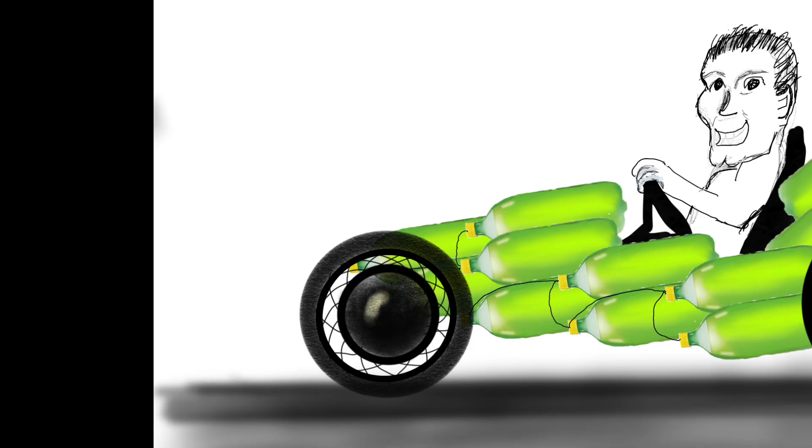Ever since I did the video with my grandson where we would pump up soda bottles to 100 psi and then shoot them with a pellet rifle to watch them blow up, I've been thinking about how I could make a motor that would run off of air, and maybe even a cart made out of soda bottles that would power that motor. That's what this video is about. Stick around.

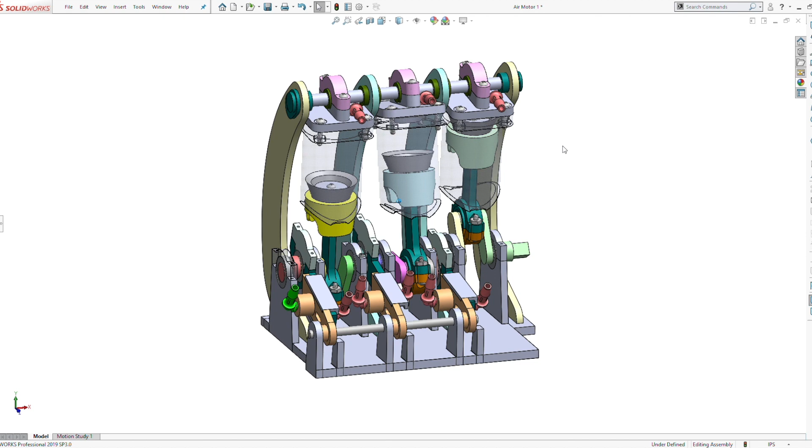Here's a view of the completed 3D model. It's basically a little 3-cylinder engine. Each of the cylinders has a 1.5-inch bore with a 2-inch stroke. The cylinders operate 120 degrees out of sync with each other, so that one will always be in what I'm calling the power stroke.

Here's a simplified view where I show only one of the cylinders, the piston, the rod, and only one of the timing valves. The compressed air enters the green elbow here and exits out the red elbow, up to the top of the cylinder where it enters. This timing valve regulates when that all happens.

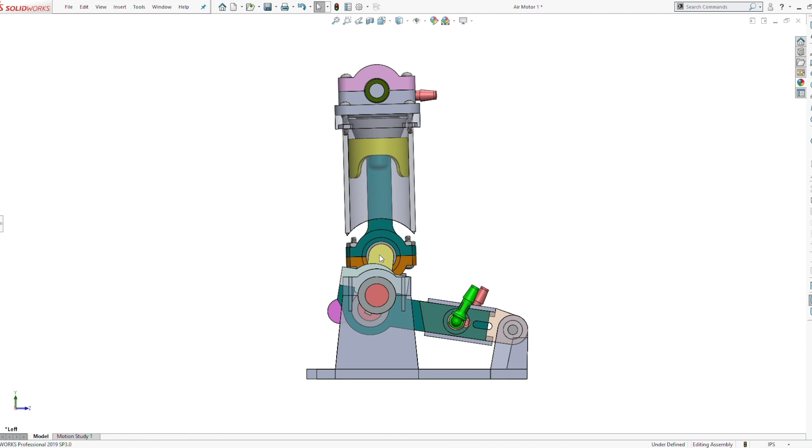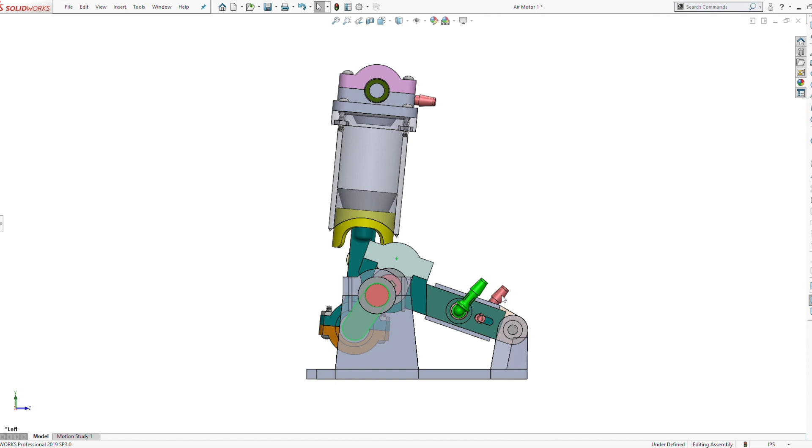As the piston is coming down in this scenario, the port with the green elbow aligns with the port of the red elbow, forcing compressed air down into the cylinder, causing it to come down. Once it reaches the bottom of its stroke and starts back upward, the air has to exit the cylinder. So the red elbow aligns with an open port on the sliding valve, allowing the air to exit. So basically you have air coming in, air coming in, air going out, air going out.

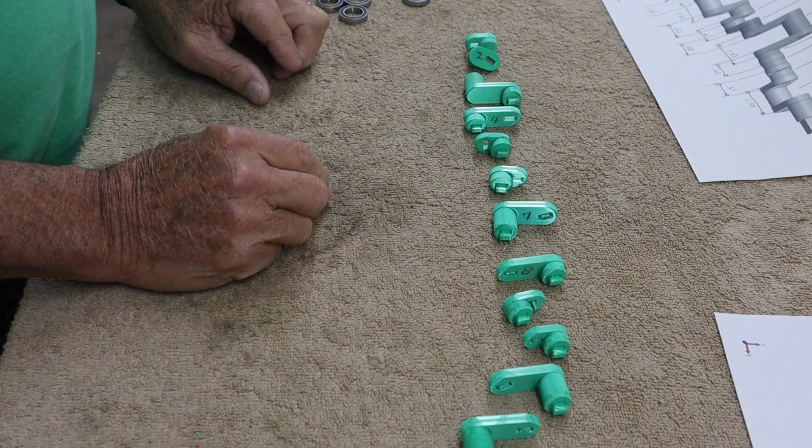Here's the crankshaft I printed. I had to print it in segments because I have to be able to put these bearings on in certain locations, so I'll have to do some sanding on them. I've already done some sanding on this one, and on this one.

In this case, this bearing is going to go right here, like so. That's part number one. Then part number two also has to have a bearing on it. It's going to go right here. You want them a little bit snug, like that. So this will go to here.

I have these indexing nubs, you might call it, where each of these pieces is indexed to the piece it adjoins. Once I get all this together and fit it into what I'm calling the block, to make sure everything's aligned, then I'll put super glue on there.

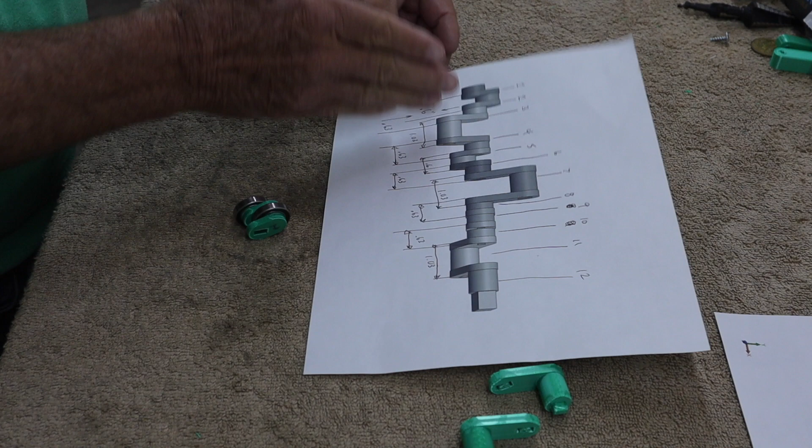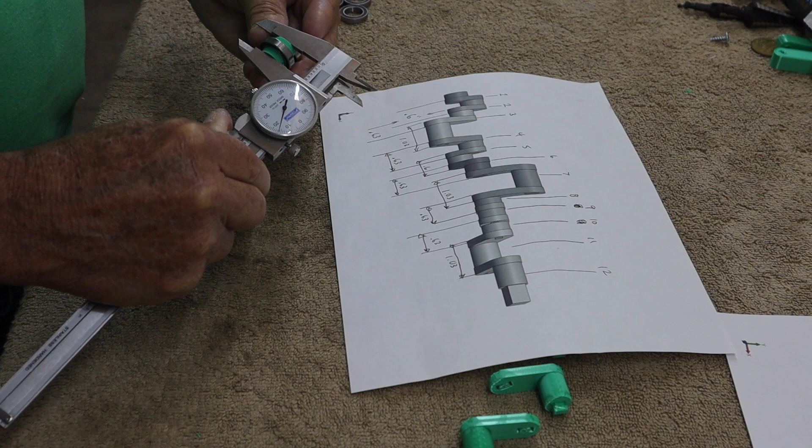Another thing I have to be aware of is that because these parts are printed, they might not be exactly the right thickness. So I've created this sheet that shows me, for example, between part 1 and part 2 I should be at 0.6 inches. I take the caliper and measure that distance just to make sure they're close together. I'm at 0.615, so this is a little bit thick. I'll have to do some work on this to get it to go together better.

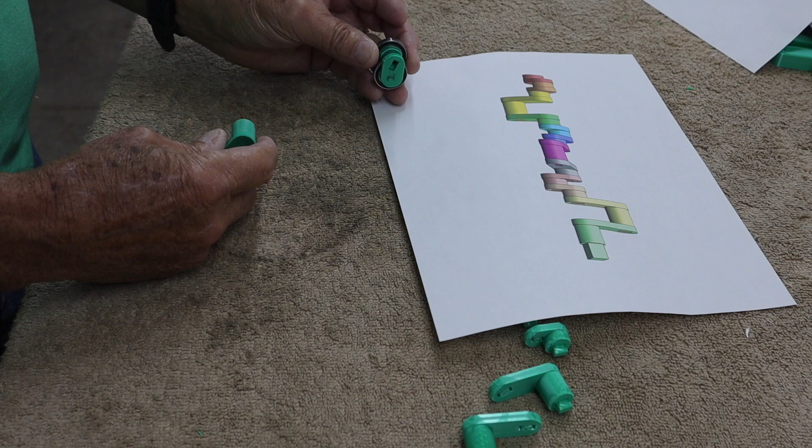Part number 3 adjoins to number 2. I can tell by my colored image that part number 3 will adjoin to part number 2 because it's turned like this. Now this part here is actually turned like this, and will be facing down like so. But I have to put a bearing on there first.

So let's slip a bearing on, like that. And then this will go like this. Again, I have to check the thickness here. I can tell right off the bat that this is thicker because I've got slack in here. So this indexing nub is a little bit too long, so I need to take some of that off.

Since it's very difficult to work with these pieces—they're flopping around and hard to deal with, and you've got to make sure you get them in exactly the right order before you glue them—I've decided to go ahead and assemble what I'm calling the block, or at least part of the block.

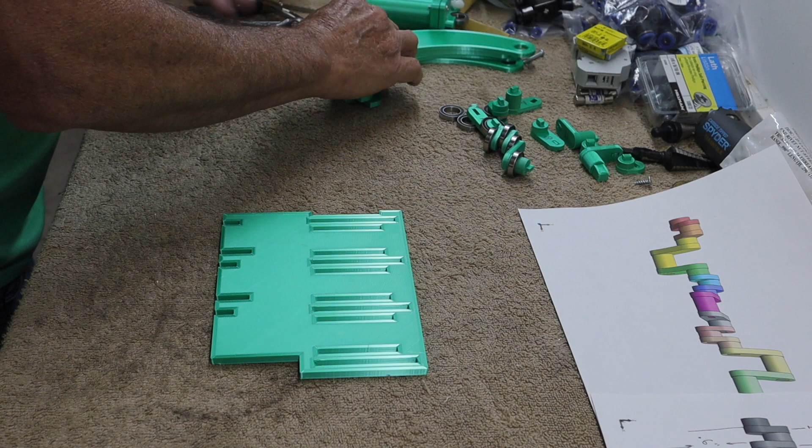Here's what the crankshaft is going to set in. So I need to go ahead and put these things in the base here so I can set the crankshaft in as I'm assembling it. I'll have me a nice flat surface here. I take these, and they're going to set in like this.

The main thing is I just want to make sure they're flush on the back, which that one is. It appears to be pretty well lined up, so I'm just going to put a little bit of super glue on it now. I don't see any bleeding through, so that'll be all right there. Let's go ahead and put another one in.

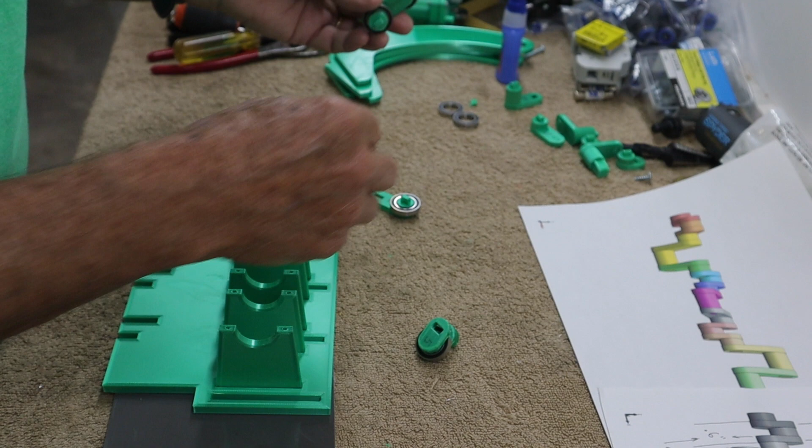Okay, this is part 1, 2, and 3 right here, and we're going to have 4 on there like so. I believe this is going to go in here right like so, like that. So you can see what it's looking like.

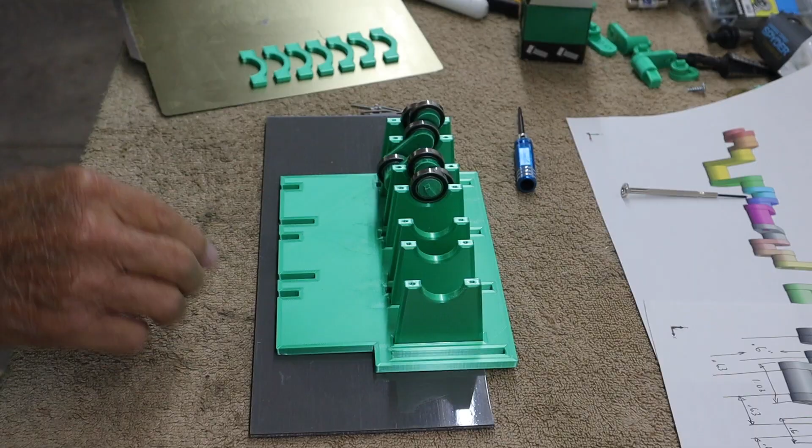Okay, so these parts are ready. My bearing caps here — we're going to go ahead and put these on just to help hold this thing down as I build it. First I have to drill these holes out a little bit.

The printed holes in these parts turned out to be almost perfect for threading these screws into without any tapping or anything. I'm just going to go real slow because I don't want to split those parts.

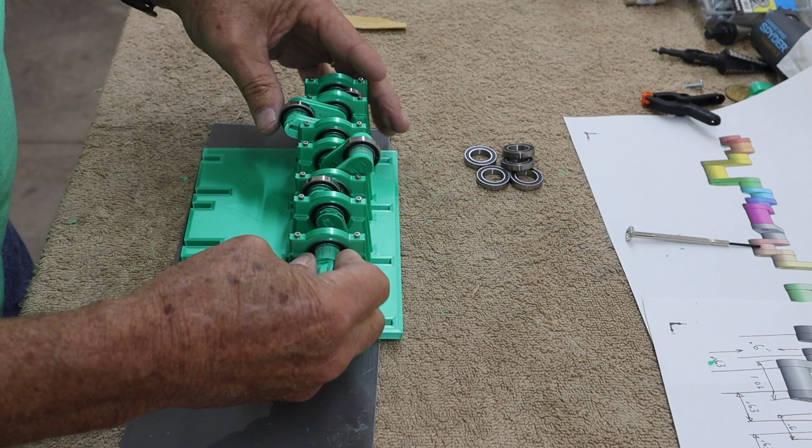I think that looks pretty good. Hopefully I have it assembled correctly, because if I don't, it's going to be a real pain to fix. So that about does it for the crankshaft assembly. We'll carry on to something else.

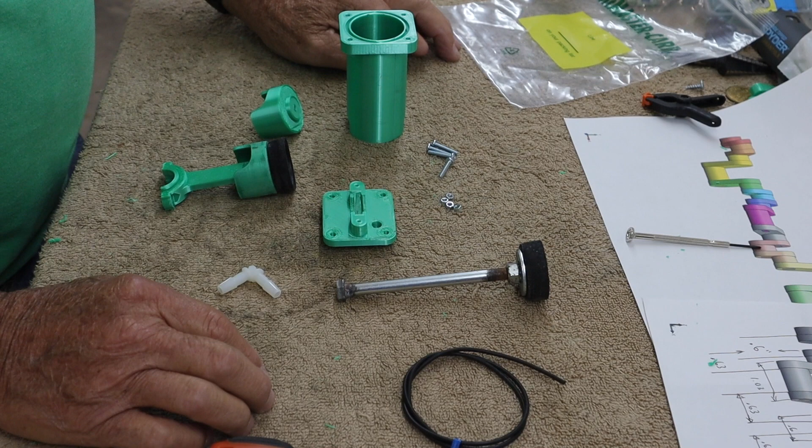Here are the components of one of the cylinders. This black part is a seal I purchased from McMaster-Carr. It's supposed to work in a 1.5-inch diameter cylinder, but in my little plastic cylinders, which are also 1.5 inches, this thing was really pretty large. So I had to put it in a drill and turn it down to where it fits in the cylinder. Now it goes like this - it's a nice, good fit.

Then I have the piston top that I printed, four of those, and here's one mounted to one of the connecting rods that I made. This connecting rod is glued in, and then the screw that holds the rubber seal on goes through a printed washer, through the seal, and into the piston and rod. That holds it all together. And then this fits within the cylinder like this.

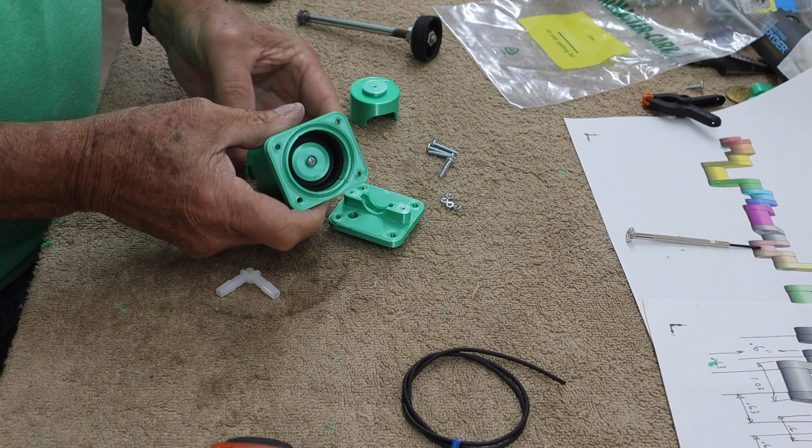One thing I'm concerned about a little bit is the friction and how much heat it's going to generate. I'm hoping this thing will run very slowly and not generate that much friction. I'm having a little trouble finding the best lubricant to put in there. One thing I haven't tried, and I think I'm going to try, is graphite. We'll get to that a little later.

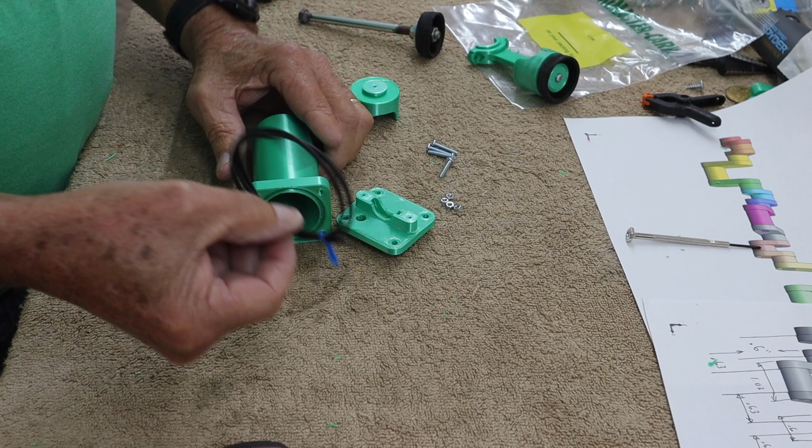But I did want to show you how I assemble this thing. So then I take the cylinder. I bought this O-ring material off of McMaster-Carr as well. So what I do is take a piece of it and stuff it down into the groove I created here.

And then when I get over here, I'm going to take and cut it just a little bit long - just a little bit. So then I pull it back out a little, get the seal started against itself, and stuff this back down in the groove.

I take the cylinder head, put it on here, and these are 10-24 screws. Unfortunately, these are not the nuts I wanted, but it's all I had. I made pockets for the proper size nut, but these are a little smaller on the OD. So we're going to put those in place.

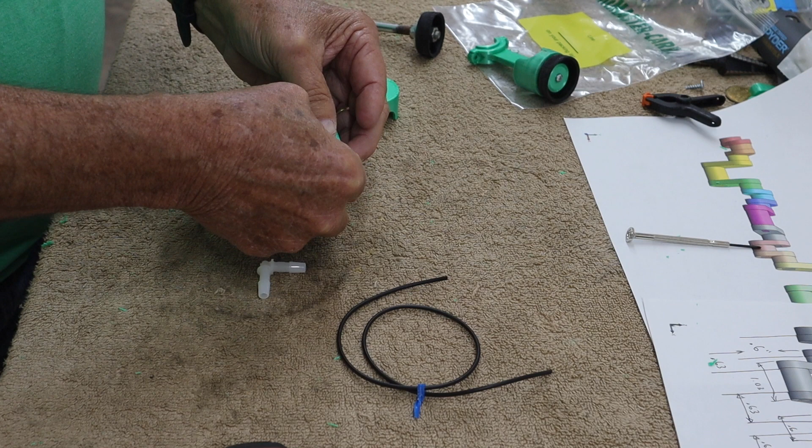These cylinders actually turned out pretty well. I sand them internally, since of course they have the lines from the print in there. So I sand them with regular sandpaper, get them pretty smooth, and I also water sand them. They're not perfectly smooth, but I think they'll be smooth enough.

Okay, so then I tighten up these screws here. I don't want to tighten it down all the way - I think that's tight enough. I may have to go back and tighten them some more later, but for right now I think that's probably good enough. Except this one is turning on me. There we go.

Now then, the bearing for the shaft - there'll be a shaft that goes through all three cylinders, and this is how the bearing fits in. It fits into the top like that. Again, the shaft will go through there, then there'll be a cap that goes on that bearing. But on this port right here, this is where the air goes in.

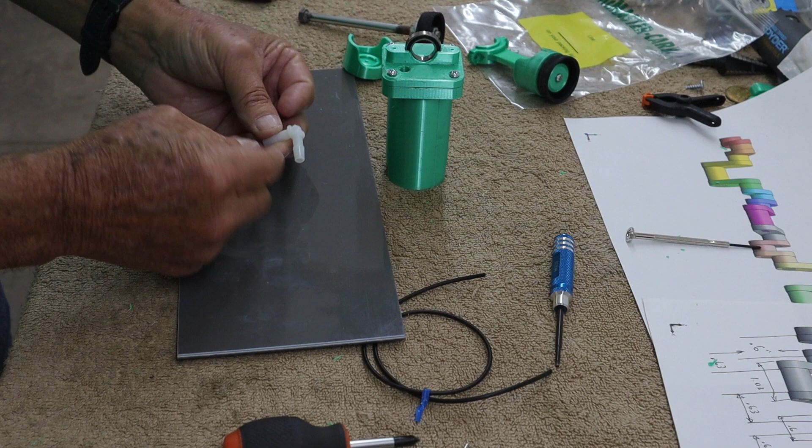I'm using these little nylon elbows, I guess they are, but I do have to do some work to them to get them to work. The first thing I have to do, and you probably can't see it, is there are three little ribs around the perimeter of the thing, so I have to shave those ribs off. Then I have to cut off this nub on the end of it, so what I do is just roll this around.

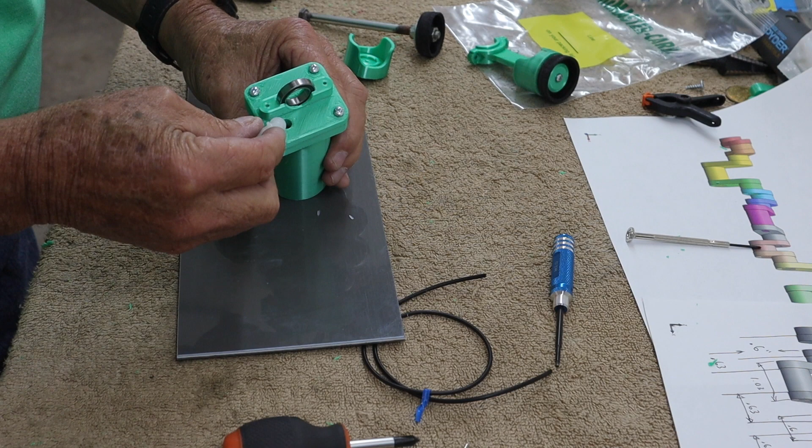There we go. So then this fits into this port here. And of course I'm going to glue them in when it's all done, but anyway it winds up like that. So you can kind of tell that I have some really good seal there. So anyway, that's how the cylinders are done.

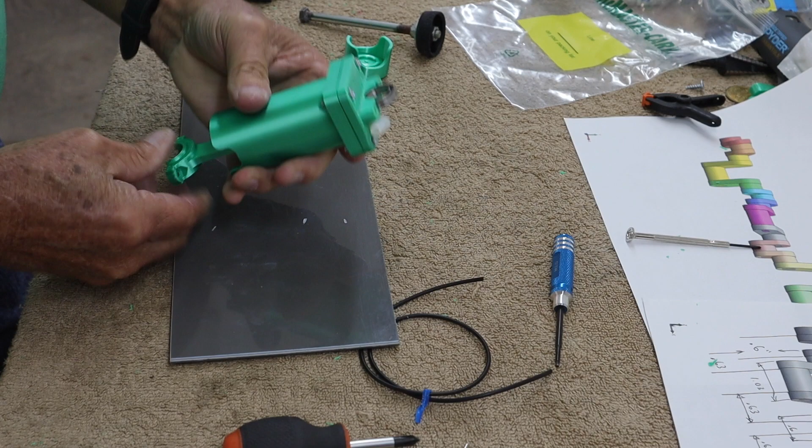Finally, after a lot of trial and error, mostly with the part I'm calling the slide valve, I think I'm finally ready to assemble this thing.

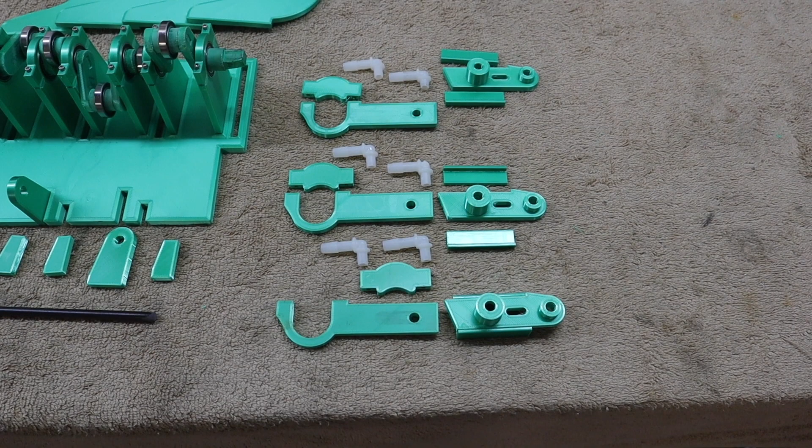Here's an overview of the parts. We have the 3 cylinders, the pistons, the rods, the 3 bearings, and the rod that the cylinders pivot on. We have the supports that support that rod. We have the block that I have mostly assembled, though I still have some work to do on it. And then we have the 3 timing valves, which have given me the most problems trying to figure out how to make work.

I'll get these temporarily placed, and then I'll come back and glue them a little bit better. Again, I just want to make sure that they're flush on the bottom, which that is.

The ones on the outside have the single hole in them because there's a mounting bracket that goes there. The ones in the middle have this bushing built into them here because the shaft goes through there.

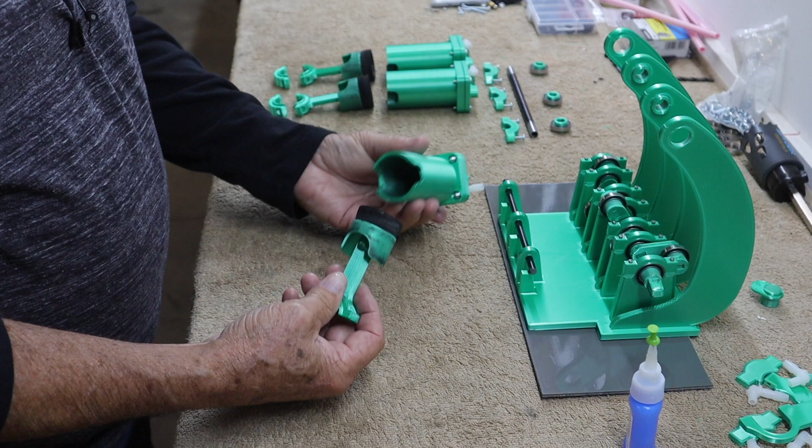Okay, so now then for the cylinders. I finally determined that the best lubrication I could use was actually no lubrication at all. I went back and sanded these down a little bit because they were still a little bit tight, and I think I have them working pretty well now.

We'll go ahead and mount this piston to the crankshaft, and we'll see how well this works. Maybe you can see that.

When you got 9.5 fingers, it's not quite as good as having 10.

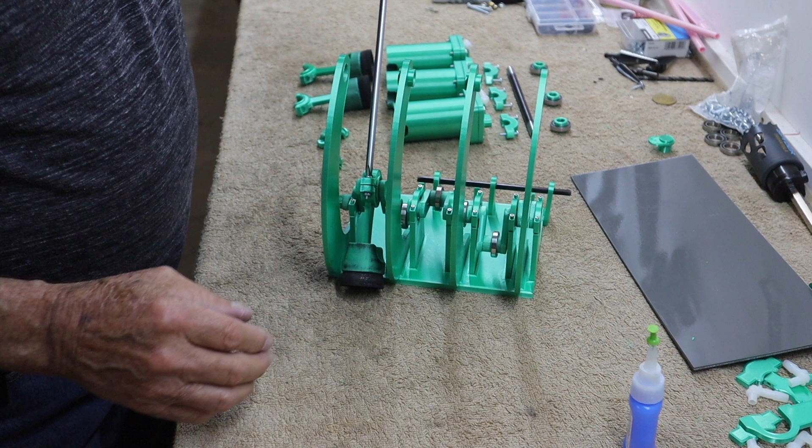Now the bearings I've used on this thing, I know are probably not the most ideal bearings, but it's what I had readily available and that I could easily get.

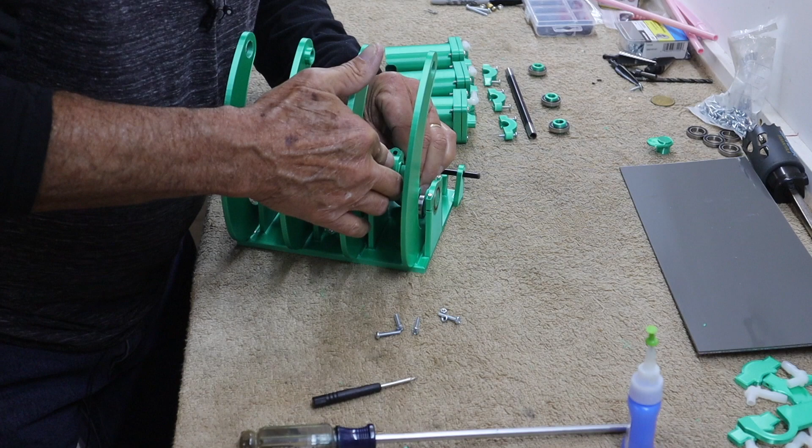Okay, there's the 3 pistons in place. Now we'll install the cylinders. I think I've already glued all of these in. Yep. So first thing we'll do is go with this one.

Okay, now we need to get this rod through here that supports all those.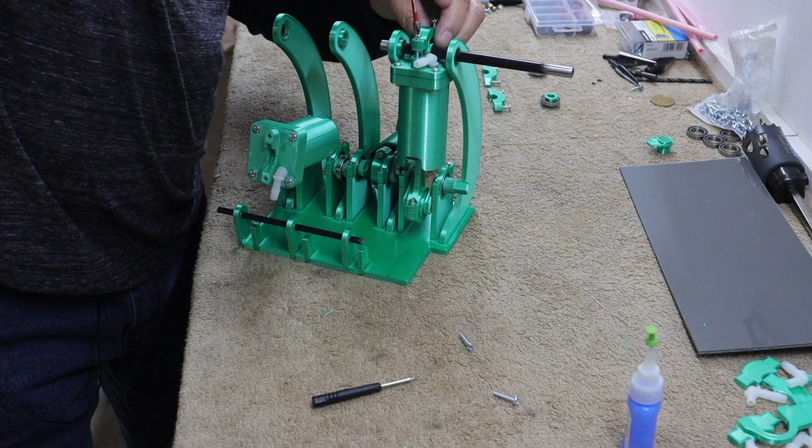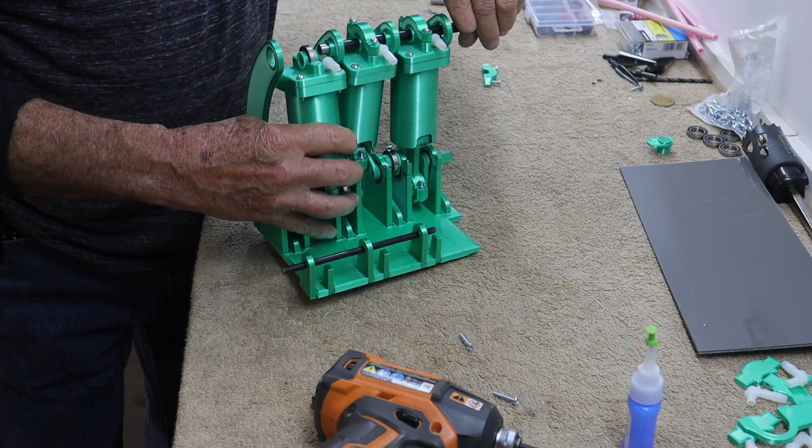Okay, now we have these caps that I made that holds that in place. It's got to put a little screw in there.

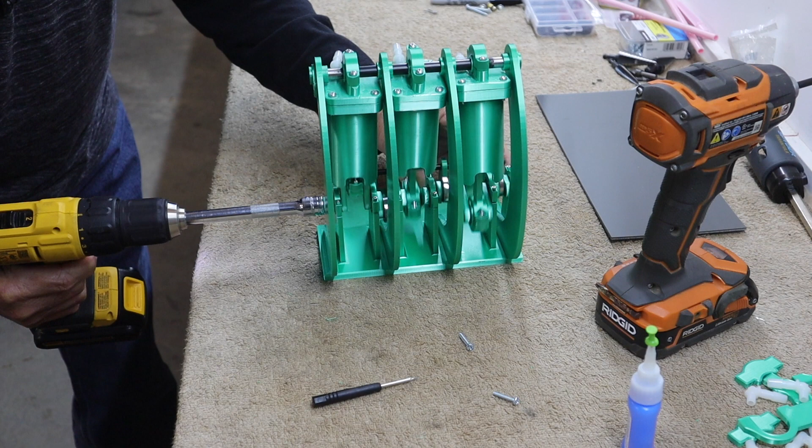Seems like it's going to work. I now have all 3 of the slide valves, or timing valves you might also call them, sanded. I have the elbows glued in place. I have the faucet seals in place with the springs behind them.

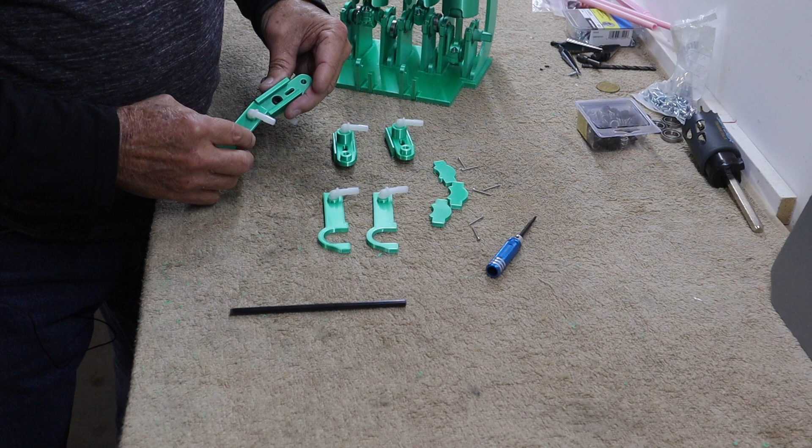So now I need to assemble these. This just slides together like this. And I have to depress that seal a little bit to get it in there, just pushing it down to get it started. Now it's in there, so now I have the first slide valve ready to go.

Let's go ahead and do these others real quick.

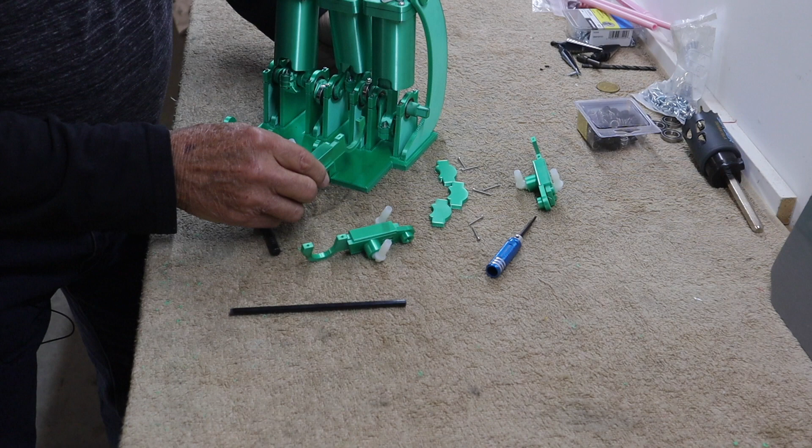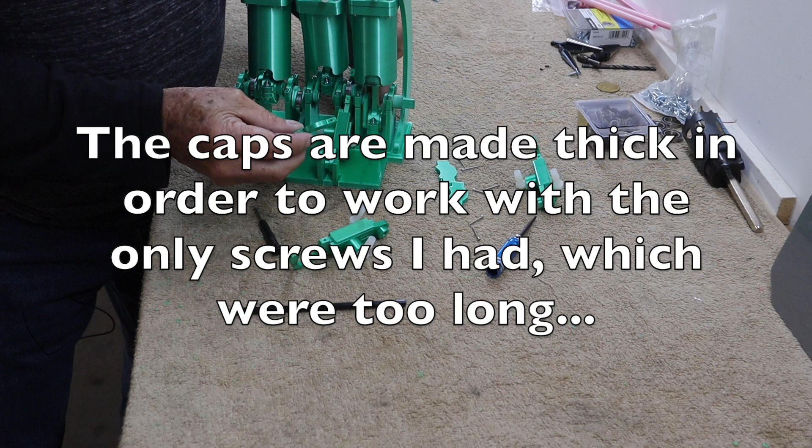All right, now then we're ready to put them into the assembly here. So it's got to go around this bearing here. It goes around, and then I have these caps made to go on there and capture them.

Now we have to slide this rod through them. Maybe you can see what I'm doing here.

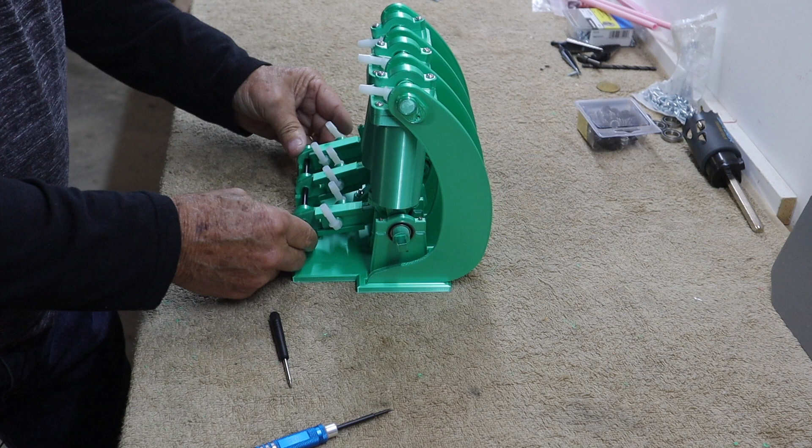And that's what's supposed to regulate when the air enters the cylinders.

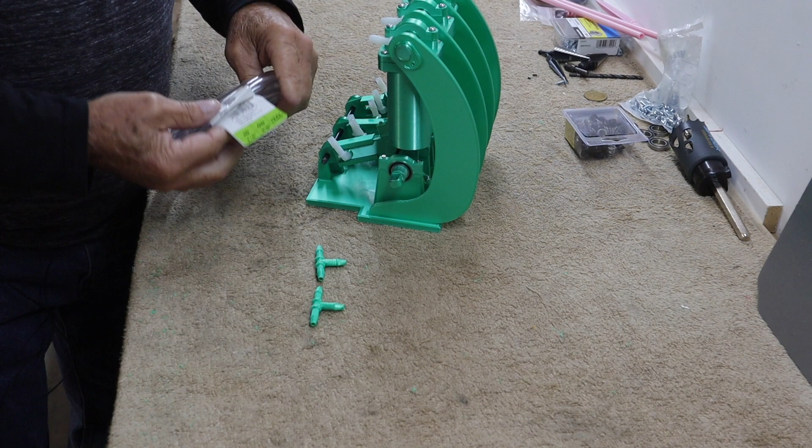So next we got to hook the hoses up. All right, this is the hose that I've got. It's not exactly what I wanted. It's a little bit stiff. I think it might work, but it's not what I wanted.

I also needed some T's, and the hardware store didn't have any. I didn't have time to get them ordered, so basically I downloaded the 3D files and printed a couple of them. Then I covered them with super glue to help seal them. I don't really know how well they'll work, but we'll find out.

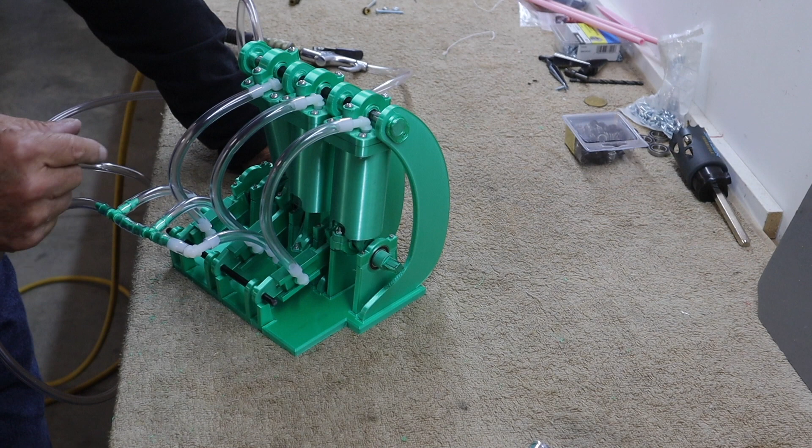Well, here it is all plumbed up. Again, I think the tubing was a little too stiff for me. And I admit I did put some air on it already. I started off about 40 PSI.

I still have leakage in my slide valves. That's been my problem all along, is figuring out how to design something that I can print and still work. I don't have a metal lathe or any kind of real metal working tools, so I'm doing the best I can. But let me show you what happens here.

If I put some air on it... well, actually, that's the best it ran. That's at 60 PSI of air.

It's not bad. Let's do it again. Sounds kind of cool.

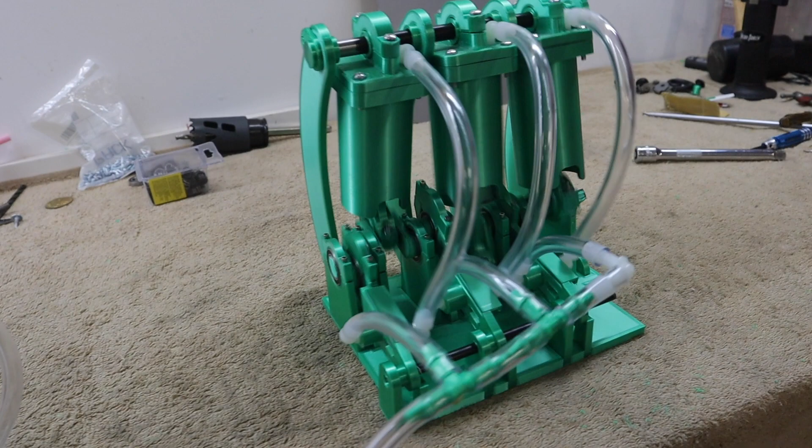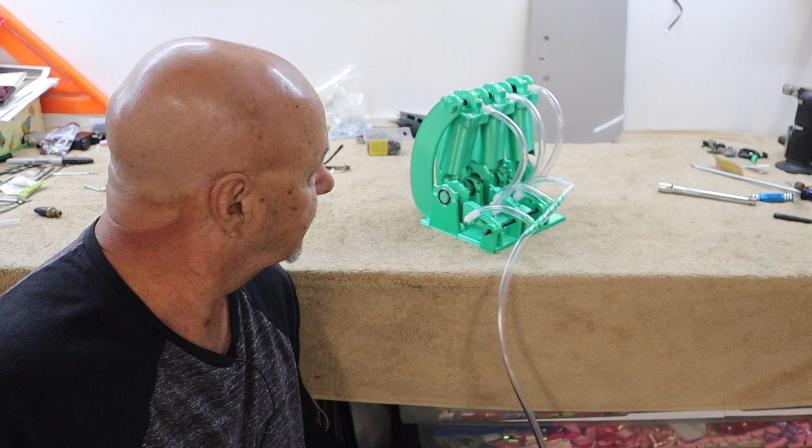Okay, there it is. There's my 3-cylinder, 2-stroke air-powered motor. It's not quite what I was expecting. I was hoping it would run on a little less air pressure. I'm at about 60 PSI right now, but it is printed parts. I don't have any kind of metalworking tools, so it's about the best I could do.